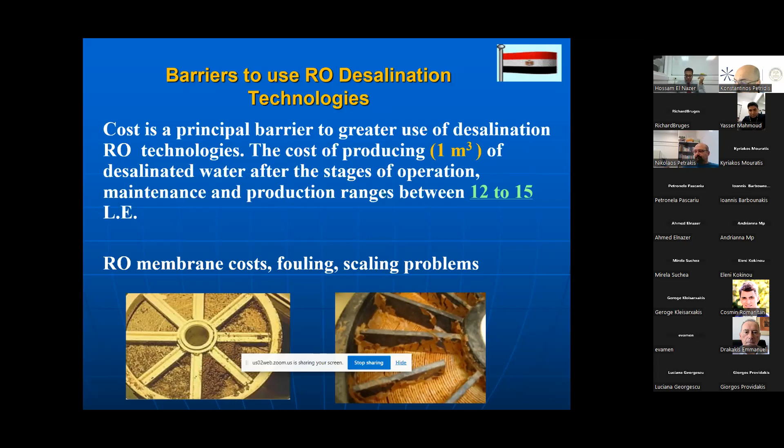My research work at the National Research Center aims, first, to fabricate low-cost, efficient materials that are antibacterial, anti-fouling, and capable of heavy metal removal. Second, to develop a reverse osmosis batch unit in cooperation with different universities. For example, we have good cooperation with Birmingham University to design and implement a low-cost desalination unit, which will save 40% of the energy used in similar stations. Third, to reduce the cost of producing 1 cubic meter of desalinated water from 12-15 to 7-8 Egyptian pounds. This system could serve farms, villages, resorts, and the north coast, as well as those located on the Red Sea coast.

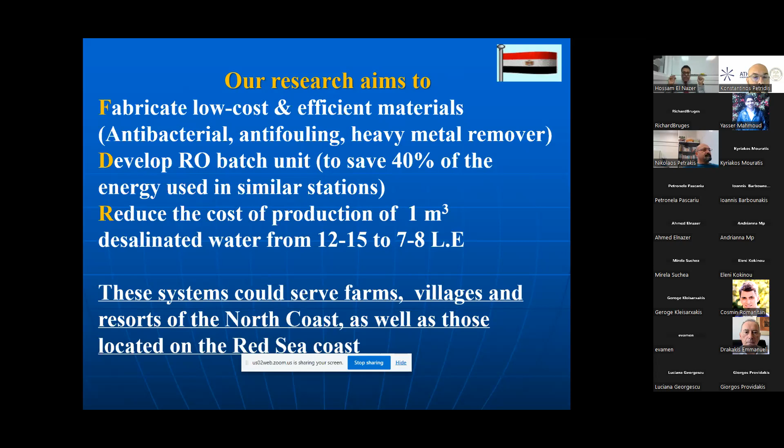Our desalination system comprises two main units: a pre-treatment unit and an RO unit. So we are working on two axes. The first axis is developing the pre-treatment system and materials, and the second axis is developing reverse osmosis batch technology, a batch reverse osmosis reactor, which could save more than 40% of the cost of producing 1 cubic meter of desalinated water.

Regarding the pre-treatment unit, we have succeeded in synthesizing advanced hybrids for bacterial removal, as antibacterial agents, heavy metal removal, water hardness removal, and dissolved organics removal, using suitable and efficient photocatalysts.

Regarding the RO unit, with the cooperation of Birmingham University, we have succeeded in designing and implementing a low-cost, efficient batch reverse osmosis system. We have also worked on synthesizing the RO membrane itself.

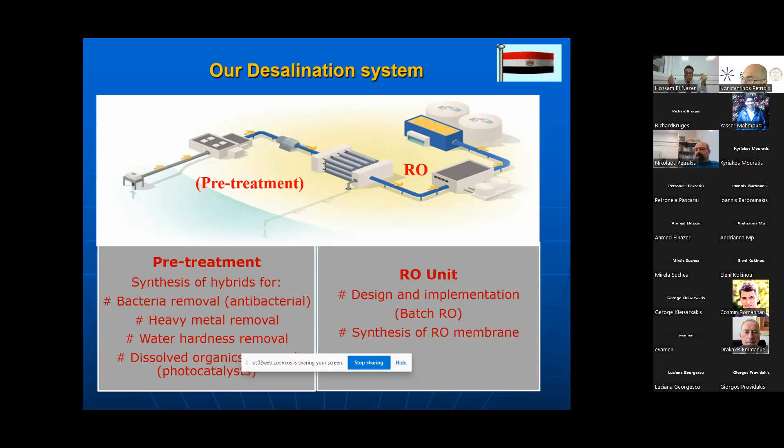Let me discuss the activities and achievements concerning water treatment and desalination work. We have had many meetings, online Zoom meetings, and workshops with our colleagues in Egypt and our partners from other countries like the UK, Greece, Italy, and the USA.

We have also worked on synthesis, characterization, and evaluation of antibacterial materials, RO membranes, and photocatalysts. Third, design and implementation of a batch RO unit. Now I would like to show you some examples of our research articles that have been published during the last year. I will discuss the article entitled 'High Potential Removal of Copper(II) Ions from Aqueous Solution using Antimicrobial Cross-Linking Grafted Gelatin Hydrogels.'

In this paper, anionic cross-linked gelatin hydrogels were successfully prepared via free radical polymerization using different concentrations of methylene bisacrylamide, ranging from 2.5 to 10%, as the cross-linking agent. Gelatin is a protein-based polymer, a natural and very cheap product. We modified this gelatin to synthesize a very efficient hydrogel, which could absorb copper ions from wastewater and also has antimicrobial efficiency to remove bacteria and microbes from wastewater.

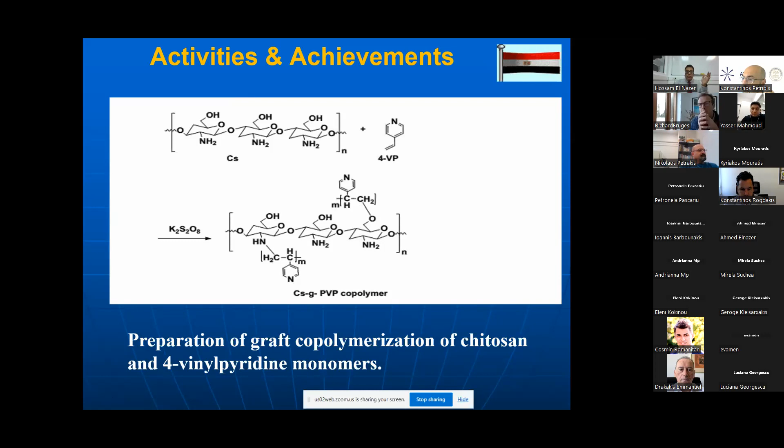Now I will discuss another research work of our group entitled 'Highly Selective Visible Light Triggered CO2 Fixation to Cyclic Carbonates under Mild Conditions' using TiO2/multi-wall carbon nanotubes grafted with platinum or palladium nanoparticles.

I actually started this work with my partners in Italy, with a photocatalysis group in Palermo University, since 3 years ago. We succeeded in preparing titania loaded with platinum and palladium nanoparticles using a photo reduction technique, and we used these photocatalysts in photocatalytic degradation of some sugars and production of hydrogen as a byproduct.

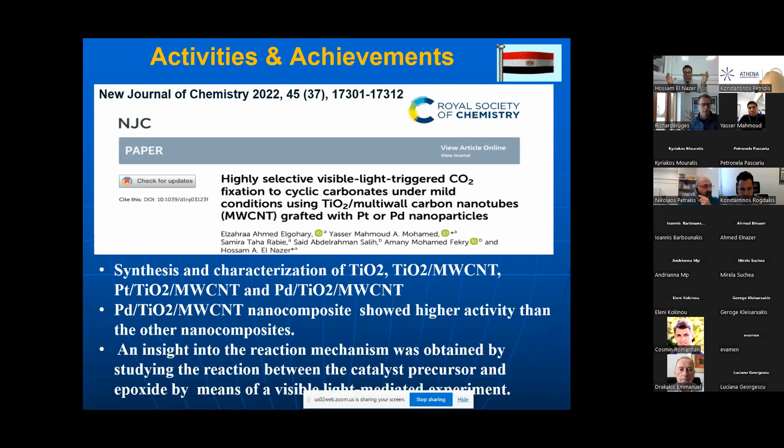But in this research work and paper, we upgraded and improved the photocatalyst by adding multi-wall carbon nanotubes grafted to the titanium doped with platinum and palladium, resulting in good photocatalysts with higher activity.

We applied this photocatalyst in a reaction transforming styrene oxide into valuable carbonate derivatives. We also introduced carbon dioxide to styrene to produce polycarbonate. So we have two targets: first, transformation of styrene to polycarbonate; second, fixation of CO2 to the styrene compound to form valuable polycarbonates. We prepared many derivatives.

As we see, the yield in some cases exceeds 98%, so this is a good yield.

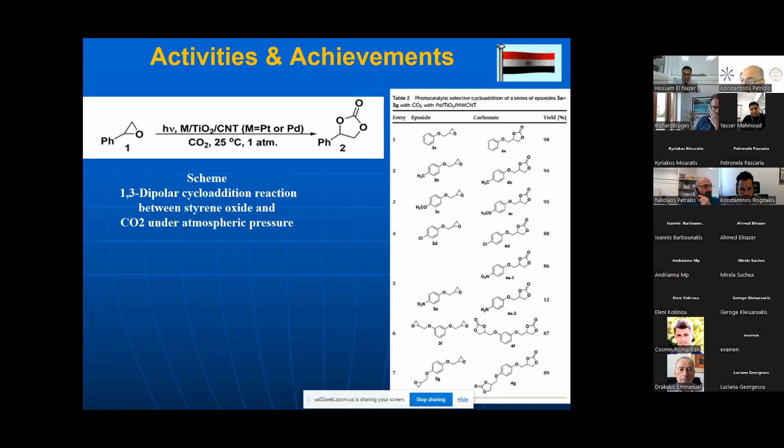Also, we have field studies during our research work. One of these studies was performed in the framework of the UK-Egypt Science joint venture project. We have a joint project with Birmingham University during the Newton Mosharafa program for design and implementation of a low-cost desalination RO unit, and we started our research with some environmental geological study.

We chose some areas in Egypt to study the quality and evaluate the groundwater there, specifically the Siwa Oasis zone in the Western Desert of Egypt. Siwa Oasis is one of the most promising locations in the Western Desert for future agriculture projects due to groundwater availability, but the salinity of water makes it detrimental for irrigation. Within our study, we found that salinity in this area exceeds 4,000 ppm, and in many places in Siwa, salinity reached 10,000 ppm. So we built our study on the quality and evaluation results of water in Siwa Oasis.

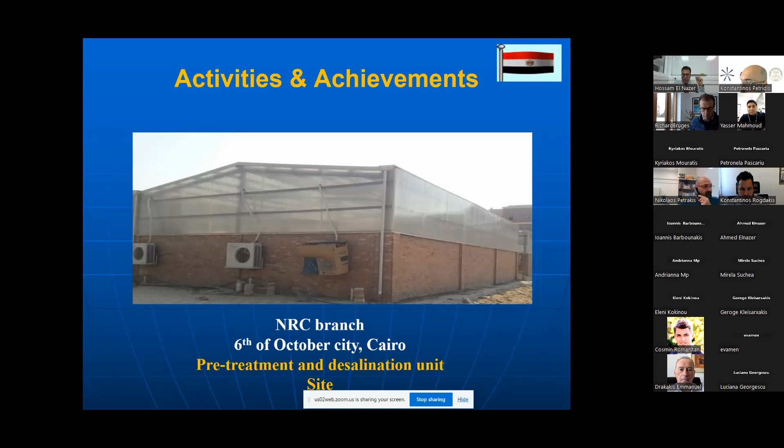Now you see our site where we designed and implemented our desalination unit. This is considered a technological site of our NRC, National Research Center, located at 6th of October City in Cairo. This is a technological branch of NRC, since we have our main branch and main building in Dokki, Giza, and a technological branch in 6th of October. This is our site where we implement our water treatment and desalination system.

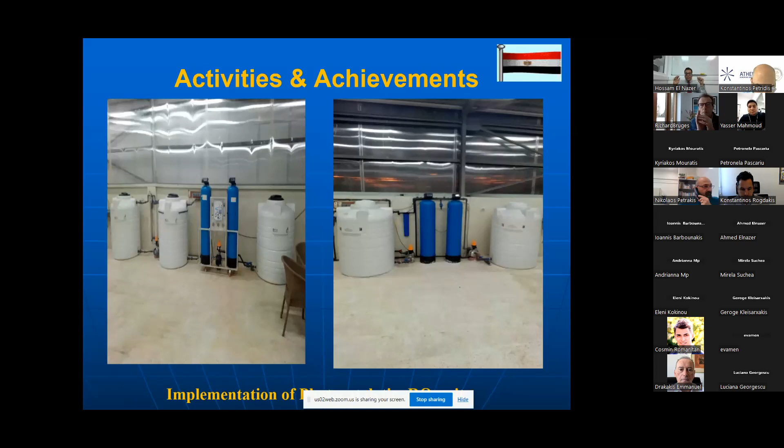This is a picture from the system that we implemented at our site there, and here are some more pictures.

This is a video showing the running of the system. I'm sorry, I will show it again.

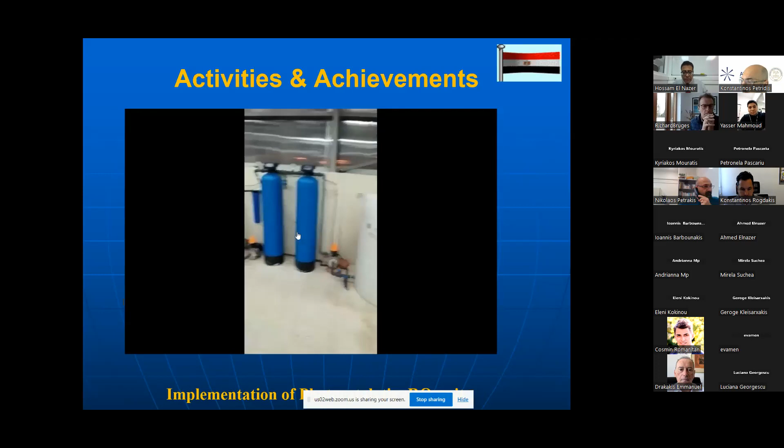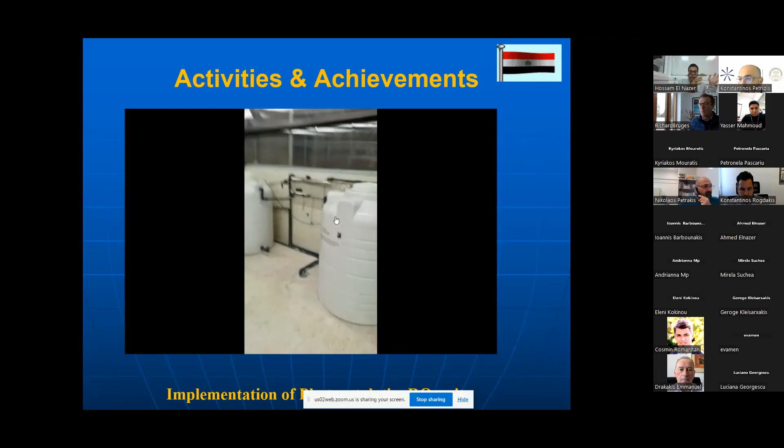And we see here the system, and this is a photocatalytic reactor, built in a pilot scale, where we put our photocatalyst here in this reactor. The photocatalyst is irradiated with a certain type of UV, and we make a circulation, controllable with a PLC system provided from Birmingham University. This is the stage of treatment of dissolved organics and everything which is dissolved in wastewater. In this stage, we could remove all dissolved organics, odor, and so on before the water goes through the RO unit. This is while working.

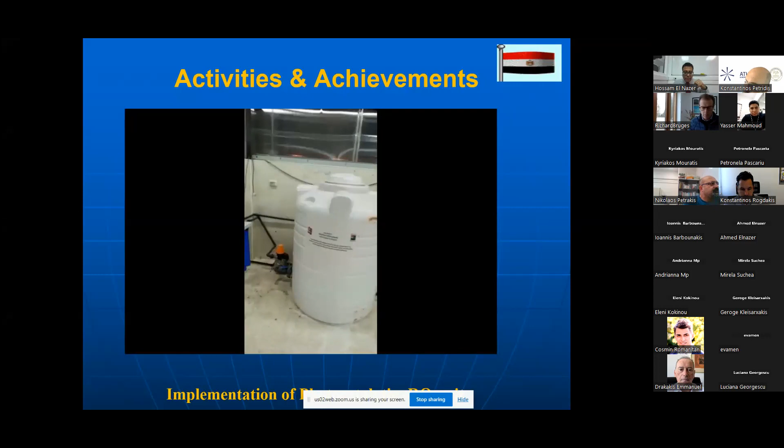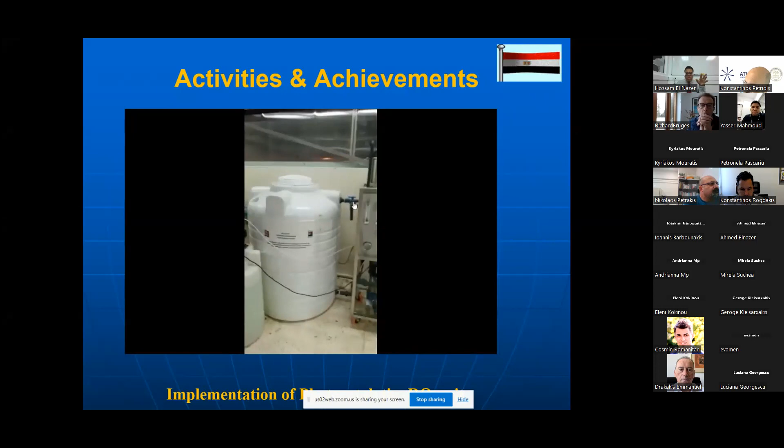So after, this is the RO system, which we built with our membrane, and this is from our design in the National Research Center. And this is the RO unit working.

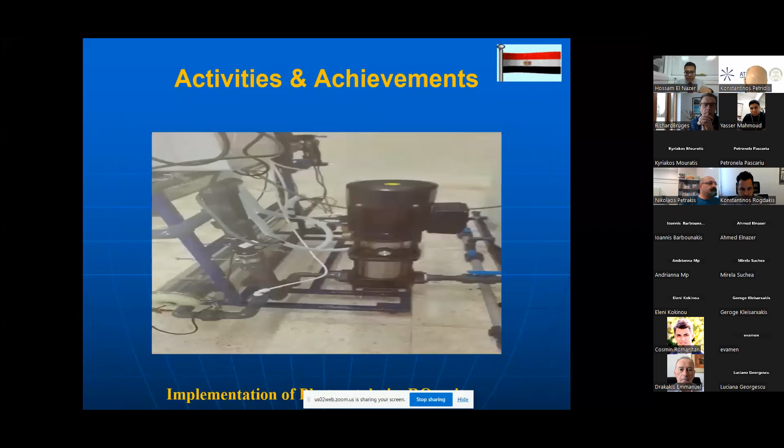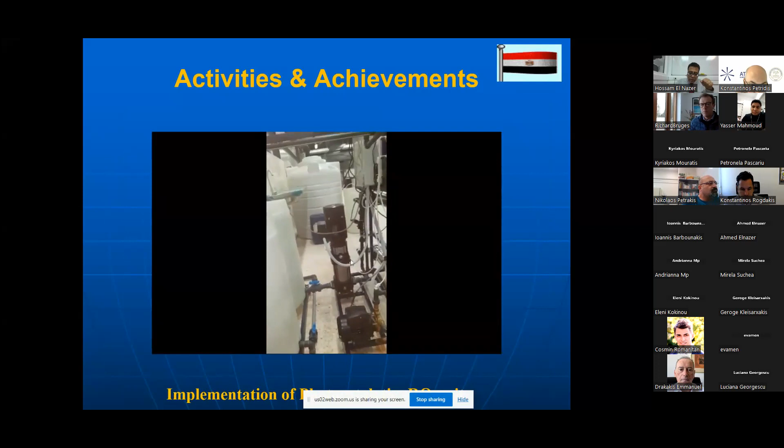This is a high pressure pump that we use, and it is 20 bar. So this system has been built and developed by our research member and the team in Egypt.

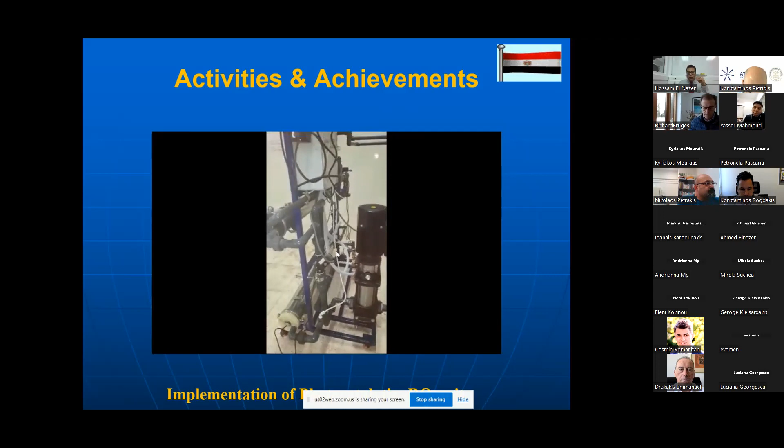And we see here the fresh water produced. And this is a control unit, and this is permeate. So this system has been designed and implemented in our technological park in the National Research Center.

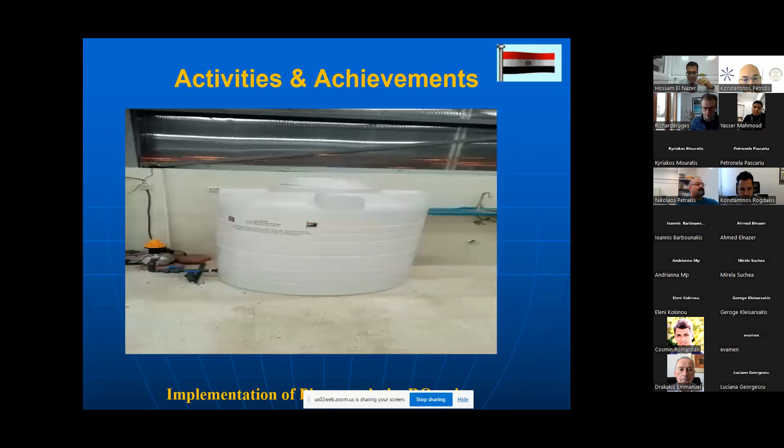And this is a picture of the whole RO unit based on batch RO technology and technique, where we see this is a control unit, and this is the RO, and this is the piston and the work exchanger. As I said before, this system could save more than 40% of energy, so the cost could reduce by 40%.

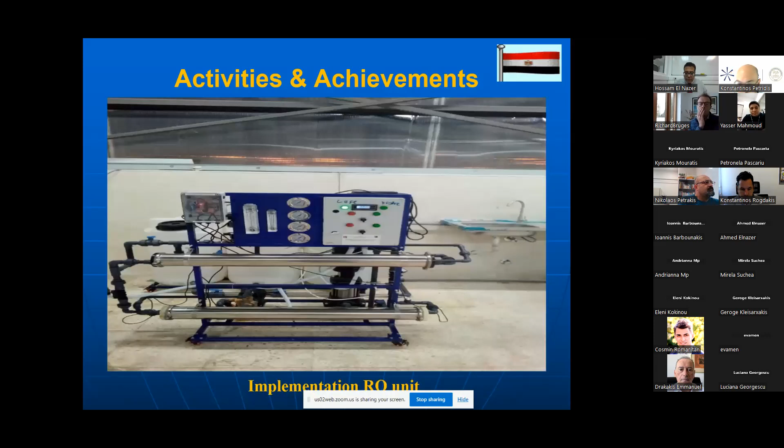So now I would like to conclude my presentation in points. First, we aim to develop new photocatalytic materials and composites with sensitivity to both UV and visible light for removal of emerging pollutants or bacteria from groundwater.

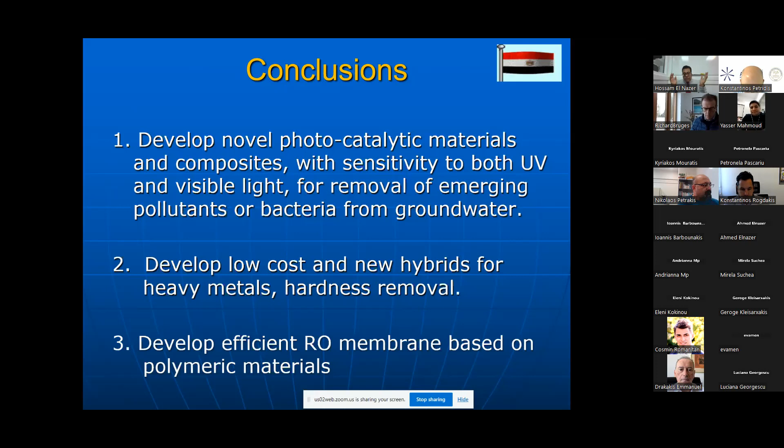To develop low cost and new hybrids for heavy metals and hardness removal, develop efficient RO membranes based on polymeric materials, develop high efficiency and high recovery desalination technology for groundwater based on batch reverse osmosis, giving resistance to fouling by organic and inorganic species, demonstrate the previously mentioned solutions in the study areas, and disseminate the knowledge generated through the Egyptian ministries and industrial partners involved in the project.

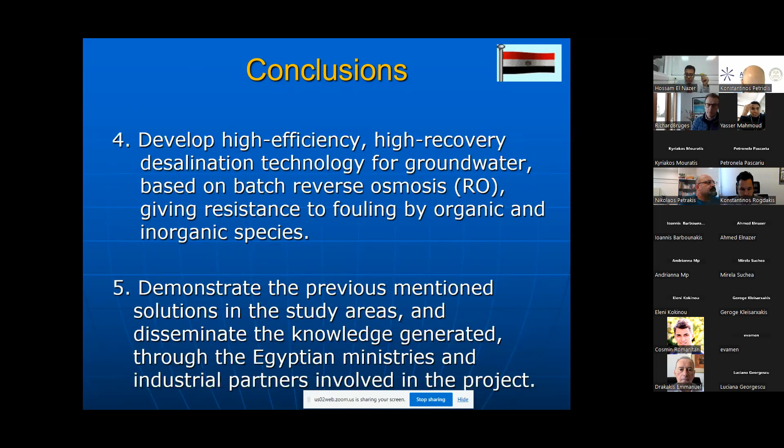And we have soon, I hope, a cooperation with Hellenic Mediterranean University, since we are preparing to sign MOU documents with Hellenic Mediterranean University, and we will discuss to have joint scientific projects.